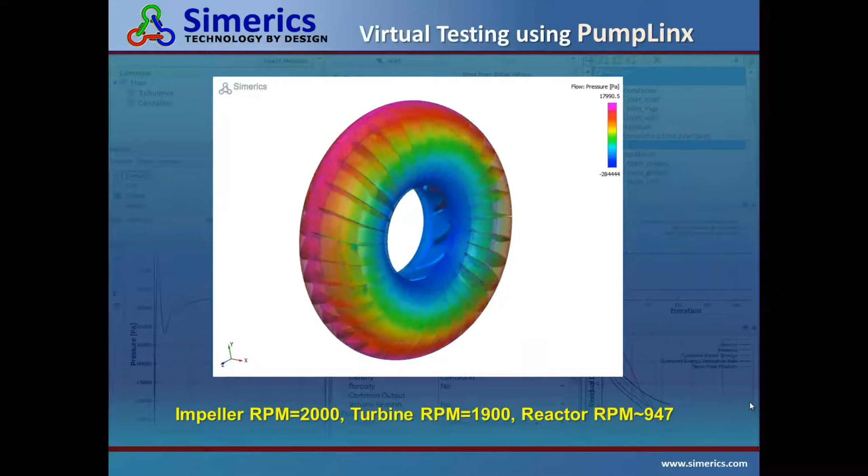Welcome to Simerics. This presentation shows how the virtual testing CFD software PumpLinx is used to model an automobile torque converter. A torque converter is a device encasing three rotors spinning in a fluid, which allows the torque from the engine to be conveyed to the transmission in a controlled manner.

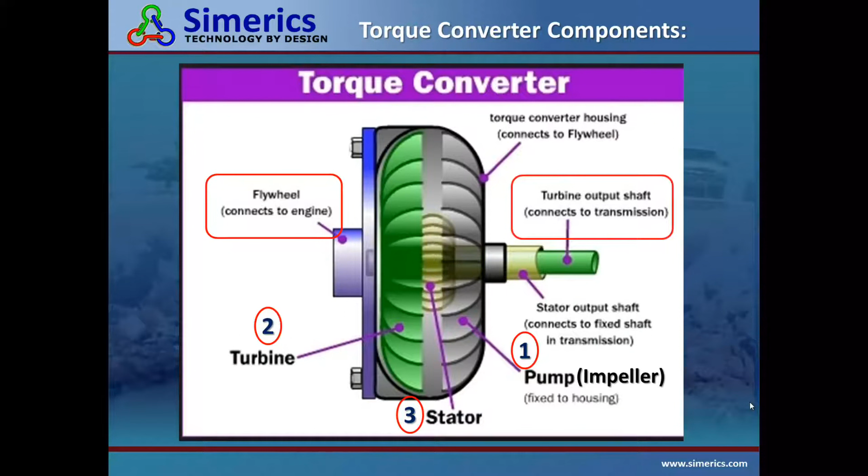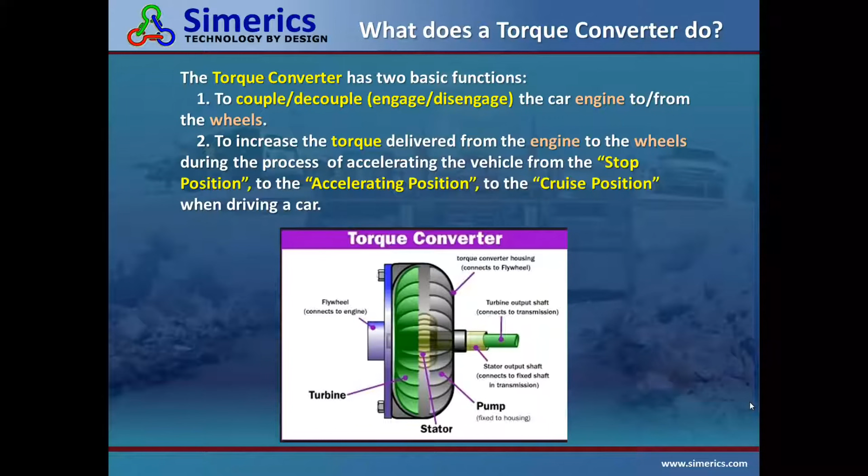It has two basic functions. First, to couple and decouple the car engine to and from the wheels, and second, to increase the torque delivered from the engine to the wheels during the process of accelerating the vehicle from the stop position to the accelerating position to the cruise position when driving a car. Torque converters are commonly found in automobiles, trucks, buses, construction equipment, ships, and railway trains.

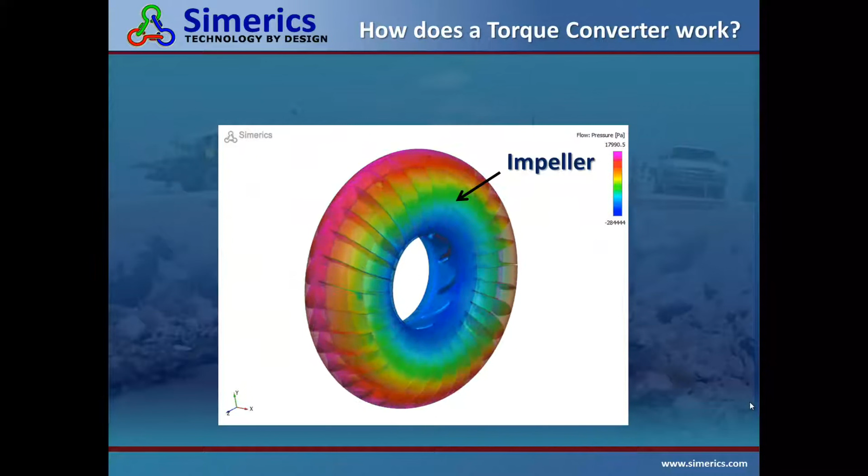So how does a torque converter work? Simply put, the engine drives the impeller, which pumps fluid through the turbine, causing it to rotate and transmit torque to the transmission. The fluid then flows through the stator back to the impeller.

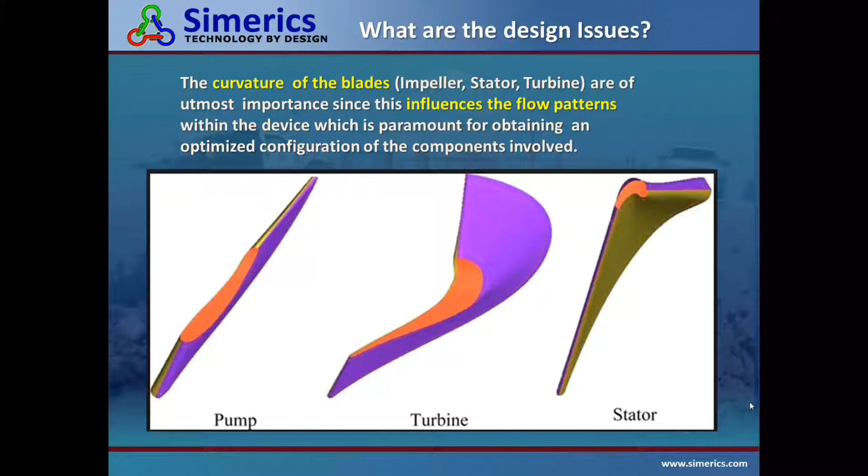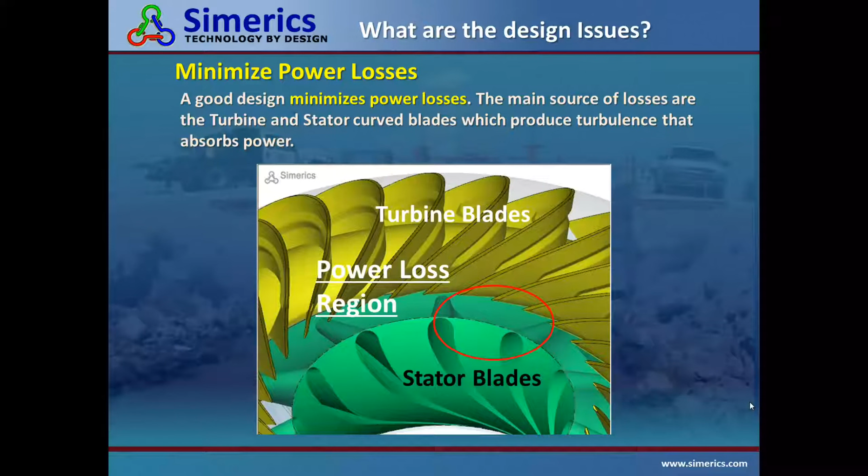What are the design issues? The main design issues are the optimization of the blade shapes, since this affects the flow and hence the torque converter performance. Another design issue is to minimize power losses. Losses occur in regions between the turbine blades and the stator blades, and also in the stator itself. Another issue is to optimize the performance over the entire operational range.

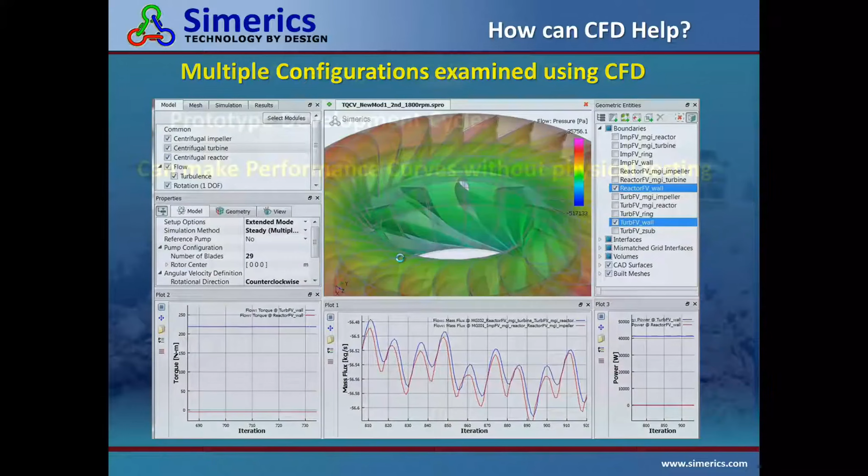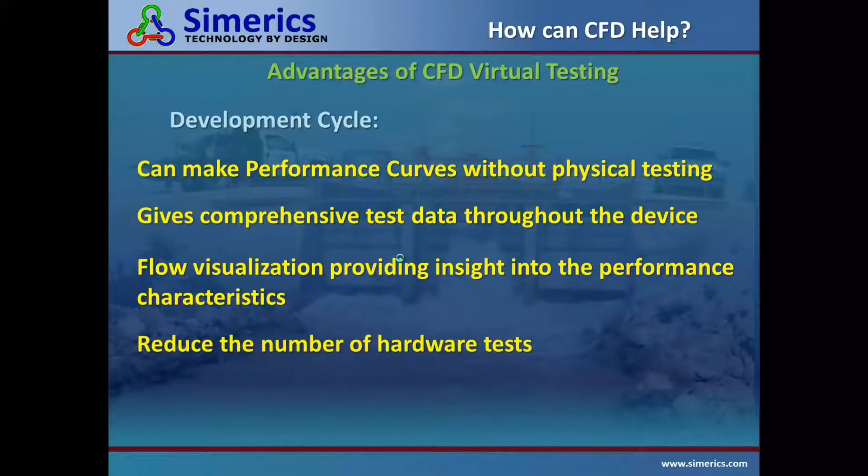So how can CFD help? Using CFD analysis, the performance of many different design configurations and operational conditions can be investigated with relatively little effort compared to laboratory tests. The advantages of CFD virtual testing over hardware tests is that the performance curves can be generated without physical testing, giving comprehensive test data throughout the device. CFD allows for flow visualization, providing insight into the performance characteristics. Virtual testing reduces the number of hardware tests and in some cases eliminates the need for physical tests.

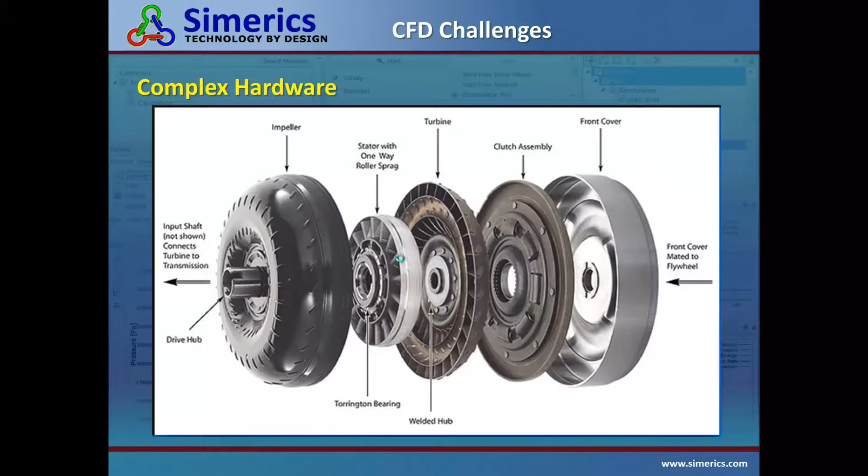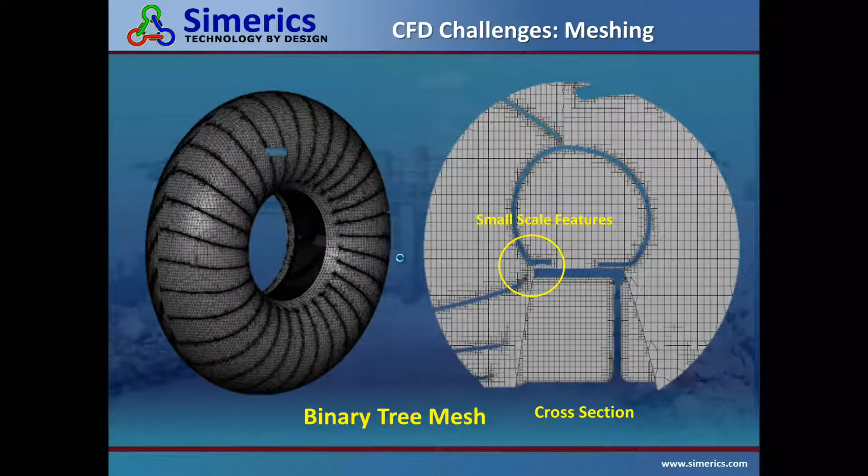CFD challenges. No method of testing is without challenges. In this case, the CFD challenges are as follows. Since the hardware is rather complex, the computational domain must be resolved using a mesh with adequate refinement of small-scale geometric features such as leakage gaps and balance holes, and must resolve regions of high flow field gradients such as boundary layers. The software must be robust enough to obtain converged solutions to problems which are inherently difficult to model.

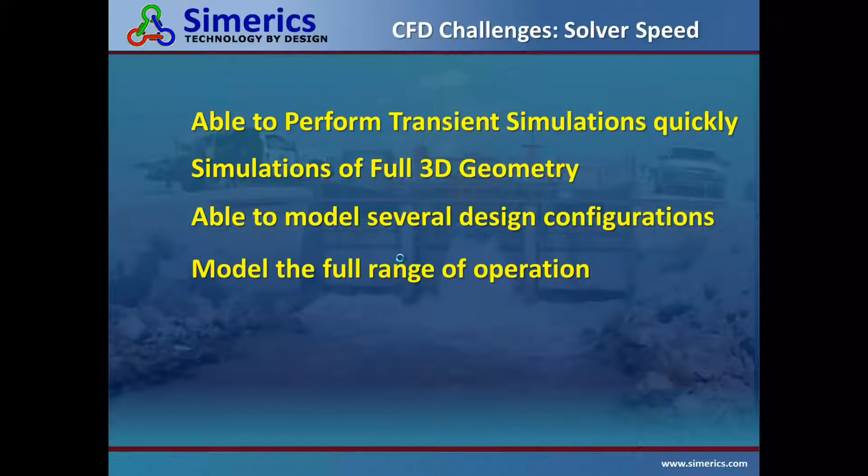The solver must be able to perform transient simulations of full 3D geometries in a reasonable amount of time. Transient simulations are necessary to capture time-dependent physics such as pulsations and vortex shedding. The solver must be fast enough to complete a test matrix which covers the full range of operation for several design configurations. Accuracy and reliability. The software must deliver accurate and reliable results which match experimental data so that dependability is established.

Here we see the PumpLinx simulation results for a full 3D transient simulation. The torque converter impeller and turbine rotate at prescribed velocities, and the stator rotation is part of the solution and is due to the predicted fluid forces.

The plots show the experimental data in blue and the simulation predictions in red of the torque ratio and K-factor versus speed ratio. PumpLinx results for a full 3D transient simulation of a torque converter matched the torque ratio experimental test results exactly for the majority of the operational range and matched to within 2.5% at the speed ratio of 0.2.

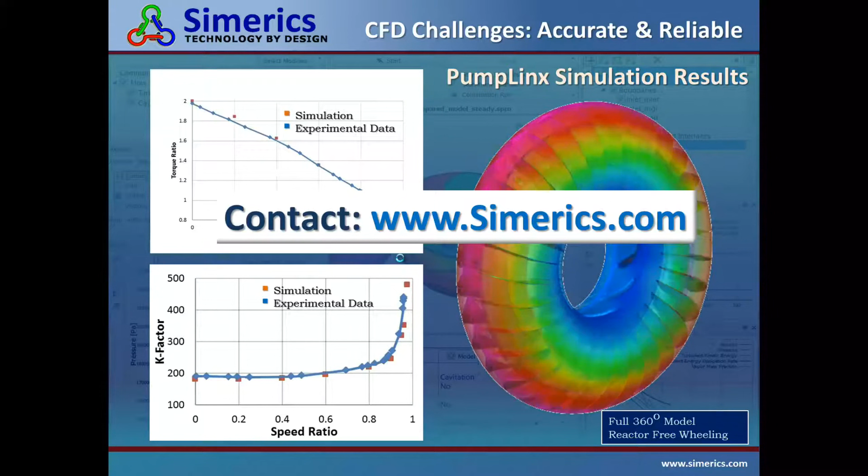The next few slides address why PumpLinx is the best tool for this application. The reasons why PumpLinx is the best tool for this particular application are revealed when we examine what PumpLinx has to offer with respect to the CFD challenges previously mentioned.

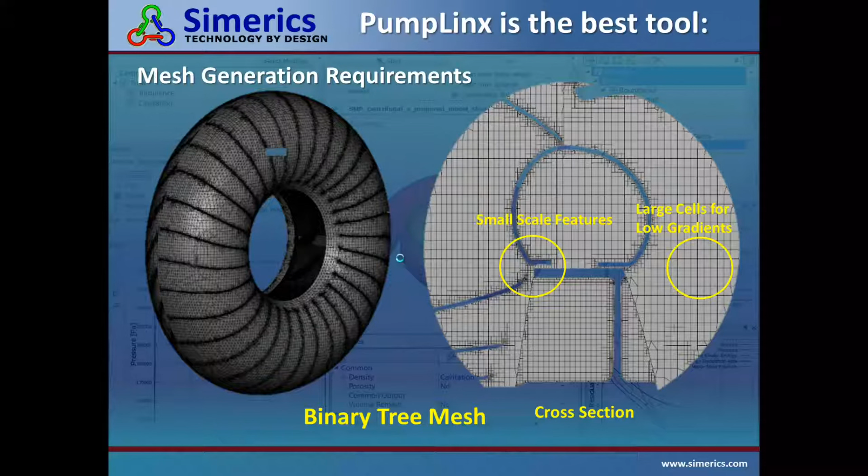Mesh generation requirements. PumpLinx uses a binary tree mesher as a general mesher, and structured meshers are available through device-specific templates. For the torque converter virtual testing, the binary tree mesher was used to automatically generate the mesh in minutes while capturing micron-scale features. It's apparent that the small-scale features are resolved quite well, and the cell count is minimized by using large cells in regions of low flow field gradients.

Solver robustness. The PumpLinx solver uses state-of-the-art numerical algorithms capable of simulating physics which are known to be notoriously difficult to model, such as translating and rotating components. In addition, the setup of such models is not only extremely simple using the PumpLinx templates, but the results have invariably been consistently accurate and reliable.

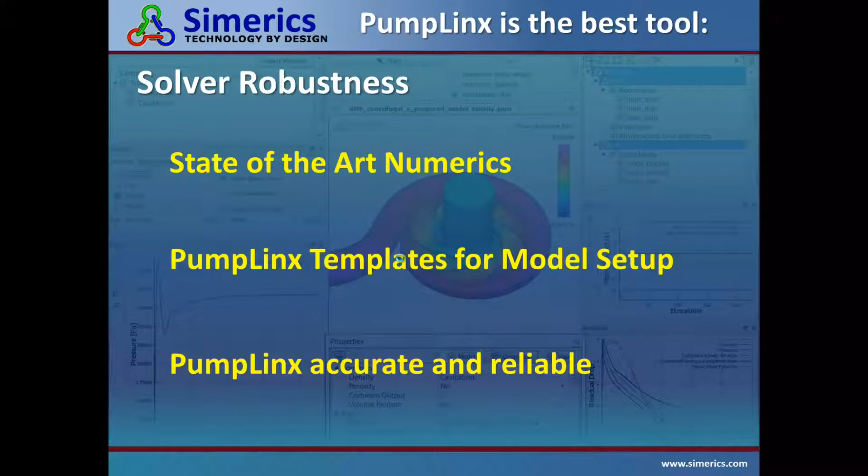PumpLinx is fast. Not only is mesh generation exceedingly fast, but the solver execution time for complex multiphysics simulations shows that PumpLinx is the fastest currently available on the market. PumpLinx is 10 to 30 times faster than other codes. This means that transient solutions are obtained in a tenth of the time required for other codes. Transient simulations are indispensable for any time-dependent physical phenomena such as pulsatile pressure waves, vortex shedding, or capturing the periodic behavior of the fluid flow throughout the device in general.

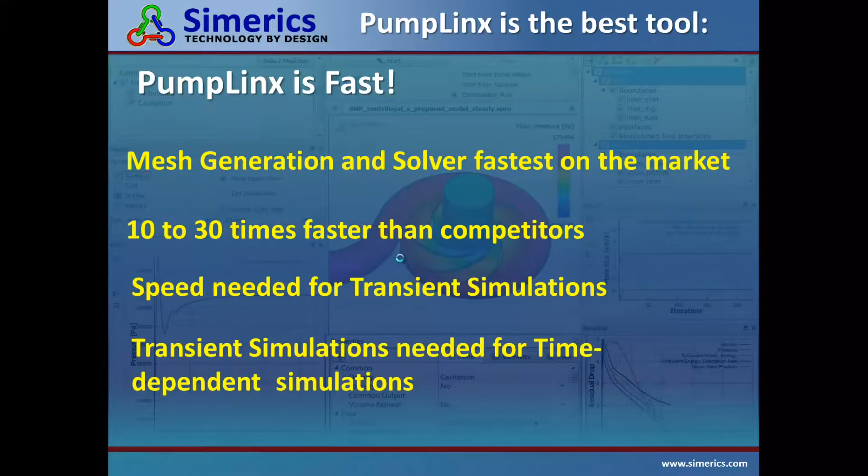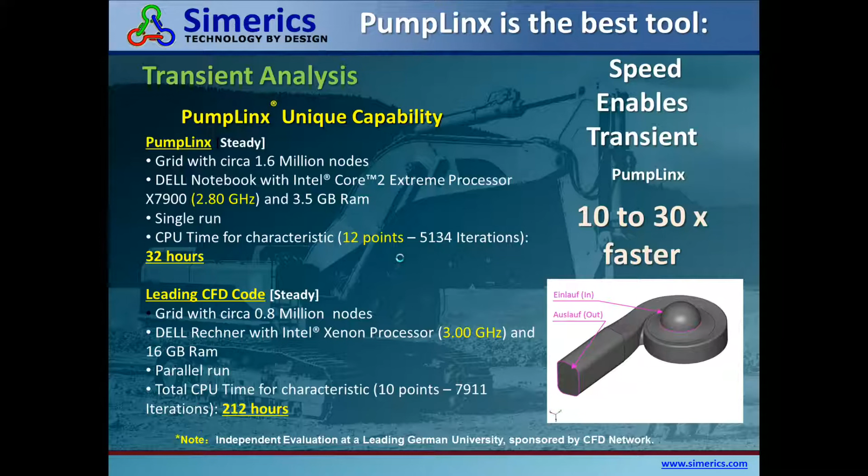This slide shows a comparison of a transient simulation performed by PumpLinx and another leading CFD code. It took PumpLinx 32 hours to analyze a 1.6 million cell model, whereas the other code took 212 hours for a model half the size.

Solution accuracy and reliability. The most important quality of PumpLinx simulations is that they are consistently accurate to within 2 to 5% of experimental data. The reliability and exceptional quality of PumpLinx performance is then self-evident when the track record is considered.

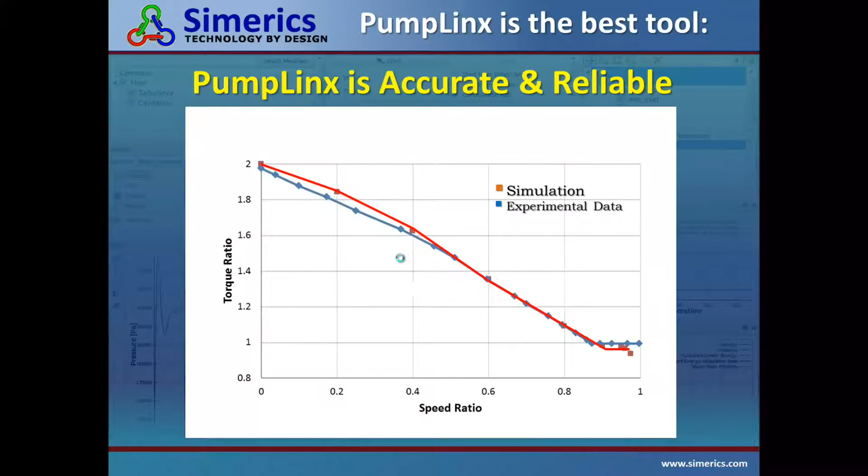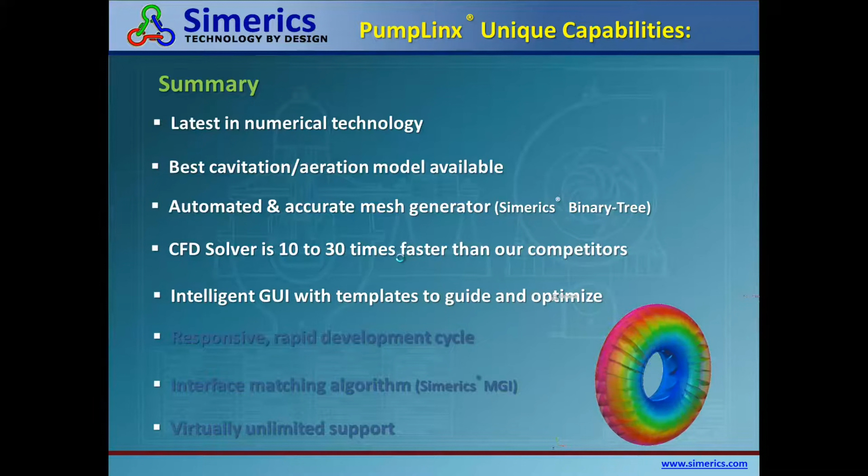So to summarize, PumpLinx has the latest in numerical technology. It has the best cavitation aeration model available. It has an automated and accurate mesh generator using binary tree meshing. The CFD solver is 10 to 30 times faster than our competitors. It has an intelligent GUI with templates to guide and optimize, resulting in a responsive rapid development cycle. PumpLinx has an interface matching algorithm, and it comes with virtually unlimited support.